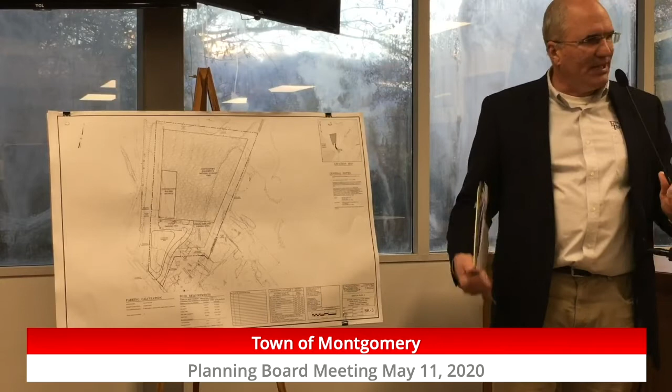Butler is proposing the construction of a 30,000 square foot contractor's office and storage yard on Dunn Road. Dunn Road is the road that services Orange County Airport, just west of 211. The site is actually kind of hidden. You got to get into the airport property, and just as you were about to turn into the fixed base operations there, you would actually turn to the right to get to this property.

The site is 11 acres. The applicant is proposing the construction of a 30,000 square foot building. The building will house office operations for Butler Construction, as well as have bays in the rear for maintenance of equipment and storage of materials in the building.

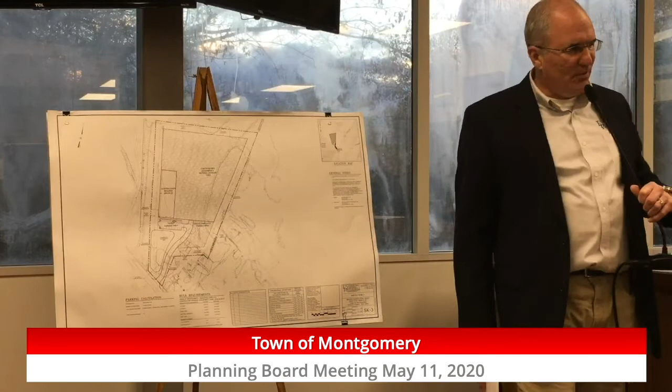There are 30 parking spots out front. Those parking spots are primarily for the employees of the building. There's an additional gravel parking area to the east side. That parking area will be used for employees that will be coming to the site, picking up construction vehicles such as trucks, and heading out to the job site.

There is a large yard as part of this operation. That yard will be used for the storage of vehicles and equipment and materials associated with the construction site. Sometimes they'll be staging materials there that need to go to the construction site, but mostly for equipment that may be going from one job to another or may be idle for one reason or another.

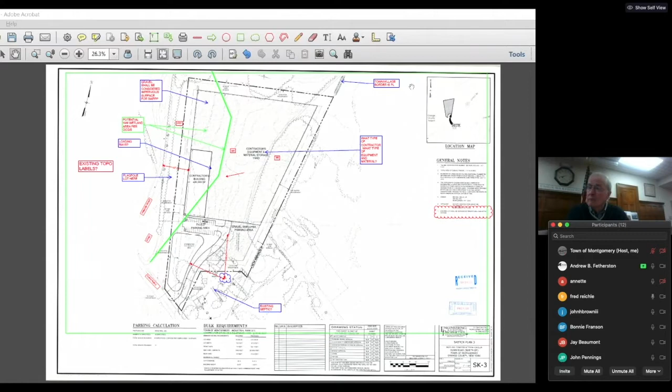We did receive the comments from the town's consultants. Be glad to discuss any that you might want to specifically. I would say there's one primary comment, and it showed up on Bonnie's review, but it was something that we were made aware of earlier this week, and it's regarding the use.

The plan had indicated this was a contractor storage and equipment yard, and I think that's incorrect, as Bonnie notes. So that is just, in my opinion, just an open yard. There's no building attached to that use. What we're proposing is the contractor's office and storage, which is a building for contractor's office area with indoor storage of material and supplies. We view the outdoor yard as accessory, and we think that that's permitted under the code, under your site plan review ordinance, that we can have on-site improvements that are accessory to the main use, as long as they are identified and approved by the planning board.

And I think that's the threshold issue we want to get clarification on tonight, to make sure that we're headed in the right direction, or if we need to get any kind of interpretation from the rest of the board, or from the ZBA. Be glad to answer any comments.

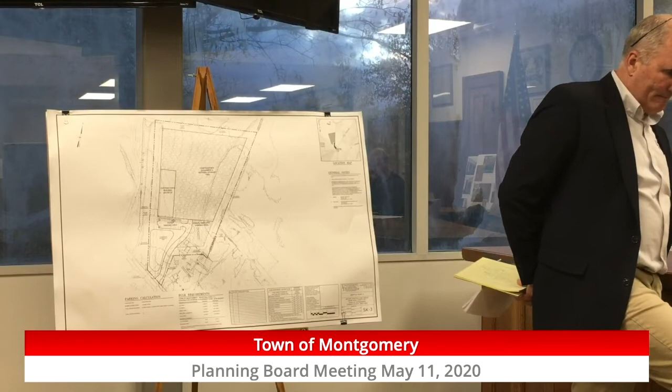Is that the same zoning district? Yes. I'm not familiar with that. Okay, was this at the corner of 460? Right, I know where the building is. I just wasn't familiar with if it had been upgraded or when it was approved, what it was approved as.

Just to clarify, Rich Hoyt here. Ross, isn't Storm King in the ID zone? I looked at it today, it's both in the I-1. My zoning map shows everything south of 84 is ID. Not the map I looked at today, but I'll believe you if you're looking at it now.

Ross, I'm having a real problem hearing what you're saying. I know it's not your fault. Is it too loud, Rich? I'm sorry, I can't hear you. Ross either. I don't know if it's too loud or too quiet. Too quiet. Okay, it's just picking up my computer, that's all it's picking up.

I'm looking at the zoning map right now, which I can share, and Storm King appears to be in the ID zone. ID or I-1? ID, as in, yes, David.

This was Marcinak's yard, correct? That yard, correct, Marcinak's, they're moving here. Whoever's running that currently is using Marcinak's yard. And this is just for machinery, it's not going to be piles of dirt and stone, or it could be. No, it could be pipe or stuff like that, but they wouldn't be delivering it twice if they could help it.

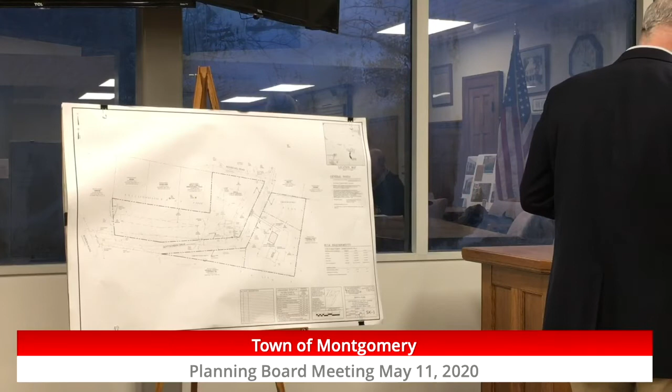While that's being done, do we want to do some of the minutes? Sure, because we've got 7 of them. So the first group of minutes we could adopt are the May 29th, 2018 Planning Board meeting minutes.

Did anybody have any significant comments, anything of substance for that? I passed mine on to Sue. Do you remember if there was a lot to them, Rose, or they were just minor? Minor, okay, all right.

I'll entertain a motion to approve the May 29th, 2018 Planning Board meeting minutes. Motion by Jay, seconded by Rose. Any discussion? Fred: I'm going to have to abstain, I don't think I was here. Okay, right, yeah, that's right, you weren't.

Fred, I have that if you want to go back to the plan — I have it on my screen right now. Okay, well, let's finish up the May 29th minutes first, if we could, quickly.

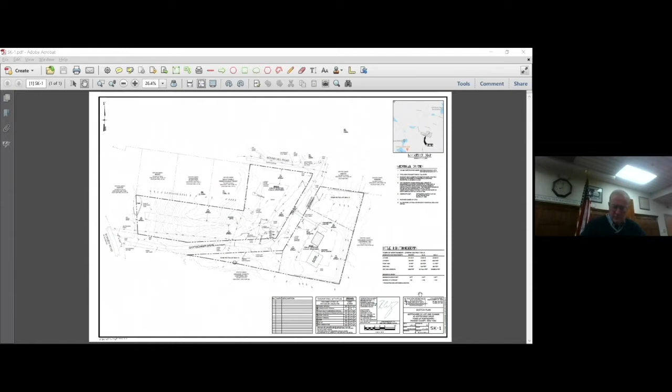Thank you. Good evening. For the record, Ross Winglovitz with Engineering and Surveying Properties, here on behalf of Gotchier Country Club for a proposed lot line change. Gotchier Country Club is a private entity that owns these 2 parcels of land on either side of Gotchier Drive. One contains the clubhouse, the other across Gotchier Drive on the east side contains an open field and a rec area with some recreational amenities.

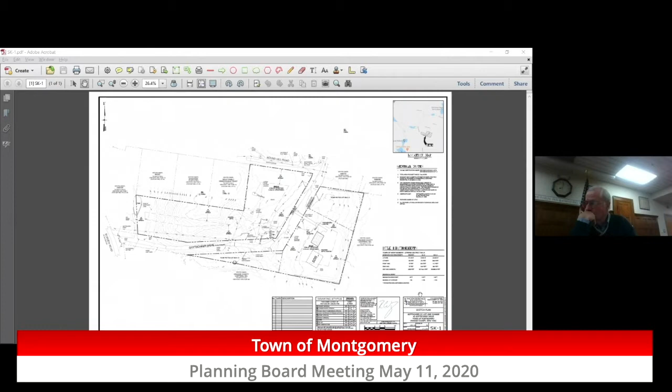The country club members are the members in the subdivision. They have decided that they would like to sell the open field area for a residential lot. They've asked us to prepare a plan for a lot line change between the 2 lots, the lot containing the clubhouse and the recreational parcel that is open space right now. That lot line change would take 2 odd-shaped parcels from the piece on the east and add them to the clubhouse parcel.

They use the area north of the house. A lot of the residents use that as a wooded area, to dump leaves and twigs as part of their spring cleanup. So they want to maintain that by the country club so they can continue to use that area. And the area to the south of the country club is also used by residents and contains the mailboxes. They would like to retain that as well, leaving a new tax lot 38-2-9, which would be about a 2-acre parcel proposed for a single family residence with a well and septic.

There is no public water here. All residents are served by well and septic. The roads here are private, maintained by the Gotchier Country Club. There is no HOA, the country club is actually a country club. I assume it's some kind of non-for-profit organization that was formed back when they created the subdivision. In fact, the original parent parcel was deeded to the country club. Once this is perfected, they would be looking to sell a lot to raise funds for the country club. Be glad to answer any questions you might have.

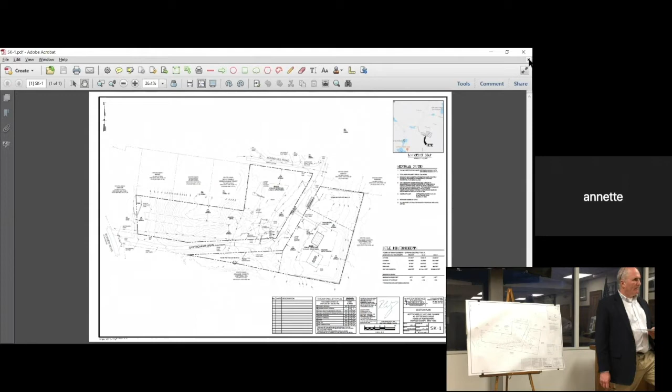To sell the one on the east side of Gottscheer as a residential lot, is that the intention down the road? The intention is this one with the house, the lot with the house that's remaining, the remaining tax lot there, 3829, would be the only residential parcel. Those two other acreage parcels would be then connected across Gottscheer.

So there's no intention of building anything? No, no intention of building anything on those parcels. They become part of the clubhouse. Is that like the ball field they have now? Yeah, it's an open rec field. And then there's a little chapel across the street too, I guess? Yes, and the clubhouse.

Anyone else on Gottscheer? Ross, my comment has to do with showing wetlands on that triangular parcel and the stream. So what Bonnie's concern is there's wetlands, potential wetlands here, in this little triangular parcel. Bonnie, we're not proposing any construction anywhere near there, so we would ask for a waiver from having to delineate that. I think it's more just to have a rough boundary of where it is, because it may not extend... well, the question is, is it subject to, in the subdivision regulations, buffers and setbacks from streams and from particular features.

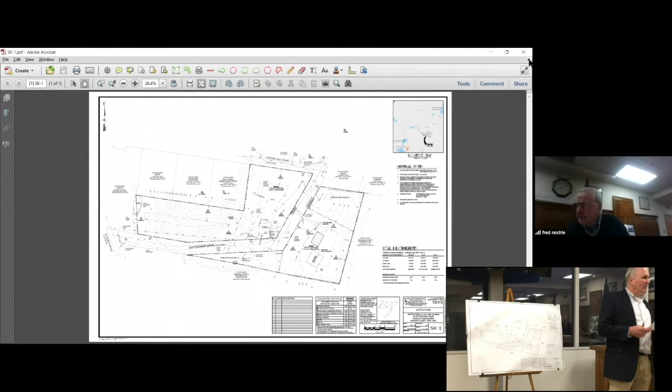And Andrew, I would just note, I think you said the mailboxes may be on the triangular piece, but they're actually in the private right of way, not in the location you said exactly. And the only thing about the triangular piece, I don't know if there's bamboo growing there.

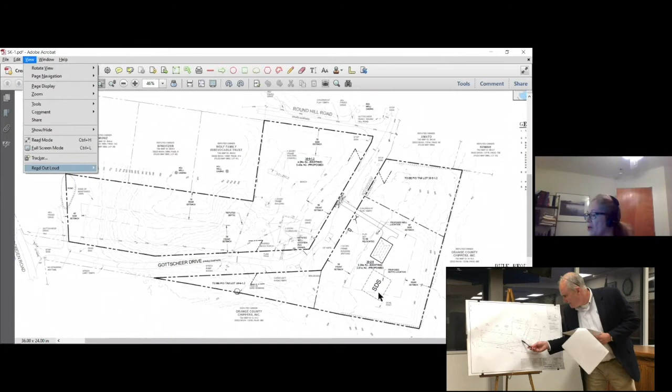In general, this is something for Andrew to take a look at - there's a catch basin. It goes underneath the road, and then it looks like it's supposed to be draining toward the stream, but because of grass clippings or whatever's happening over there, I think it's kind of blocking it off. So as a matter of practice, it should probably be looked into.

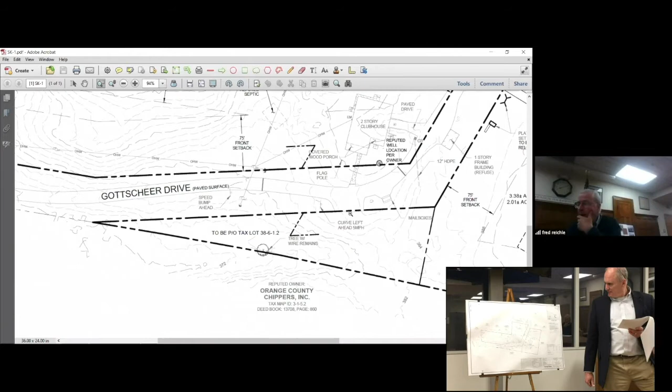And Ross, right now there's I guess a trash storage building that's on Gottscheer. Yeah, so that's going to stay in its location, in front of the new house. It's not going to be relocated, right? Correct.

All right, and you otherwise have my comments. I was going to bring up that wetlands issue to see how you wanted to handle that, so that's good. The goalpost, I don't know what condition that's in. If it's in any kind of condition, I would prefer to leave it because the future owner may want it. Let that be between the two private property owners.

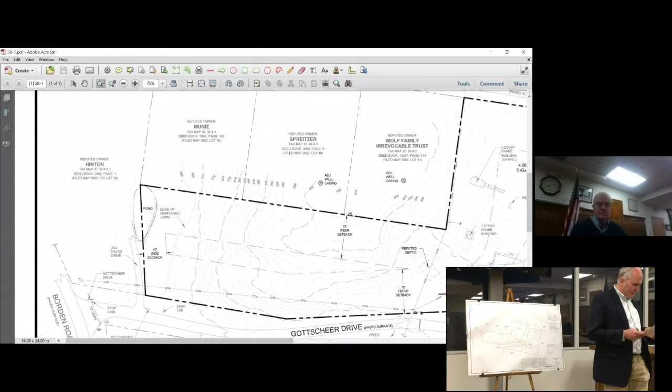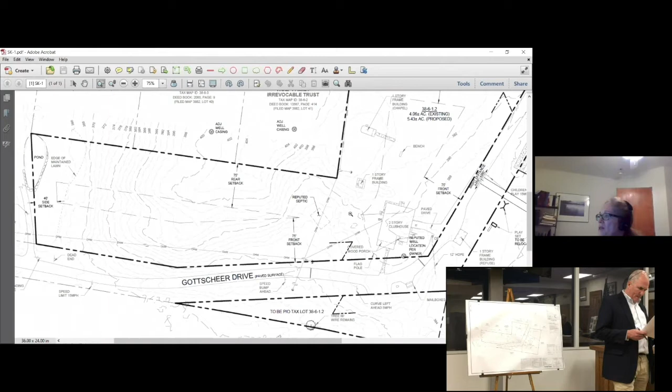It's a nice field there, they have a soccer star in their family. The rest of the criteria, I think we can meet, we'll demonstrate that in our response. And then the only other thing is maybe a note, if we're not going to do mapping or we're going to do approximations - that stream, if you look at the environmental resource mapper, is designated, I think, AA, because it's tributary to a water supply.

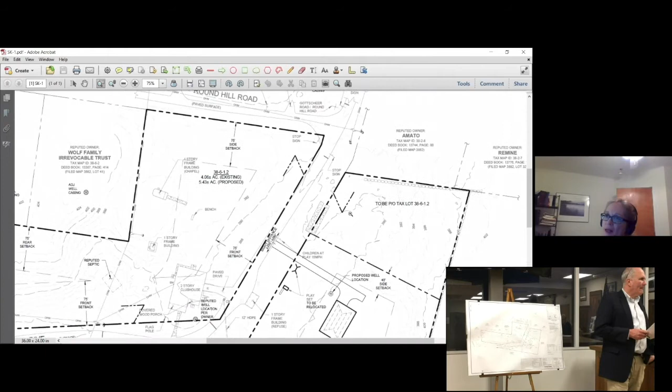And so DEC, if anything's proposed within 50 feet of it, you might need a protection of waters permit. So just as maybe a map note, we could put something to that effect about recognizing it's an AA stream. We'll label it on the plan and provide it up to that effect.

Okay, anyone with anything else on Gottscheer? I had one more question, Mr. Chairman, Rich Montemorano. Why isn't the property line coming up to Gottscheer Road? Why are they set back, and what's with that piece of the long strip of land in between the lot lines and the road? Is that intended to be attached to something at some point?

No, that's all the old right of way, Rich. We don't know who the owner is. It's not shown as public right of way, it's not shown as owned by Gottscheer Country Club. They in fact do maintain all those roads. So where it does cross out of the right of way, it crosses onto the country club's property, so at least it's their responsibility to maintain it.

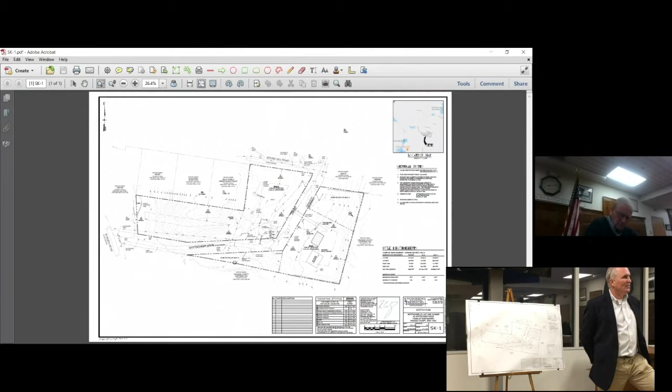Ownership issues. Is it paved or wooded? It's paved, yeah. So the whole area in between the lot lines is paved. Between the pavement and our lot line at the front is all grass area. Yeah, there's some large trees that Bonnie noted, we'll show to make sure we avoid, and it's all grass. All right, thank you, not understanding that. Thanks, Rich.

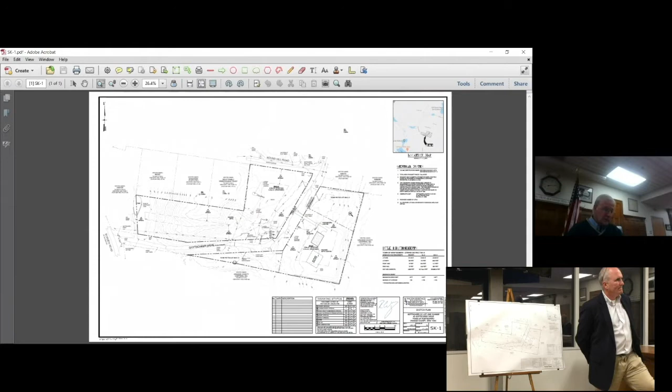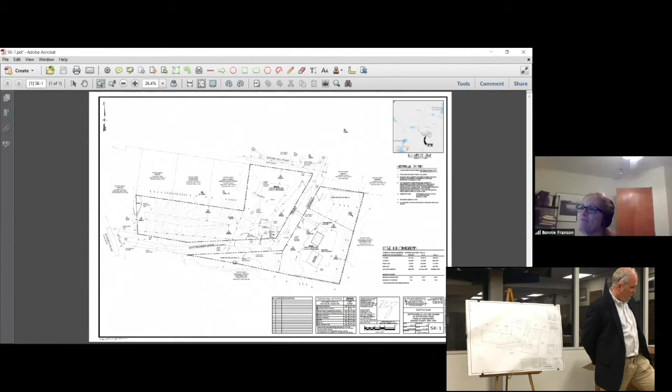Okay, anything else, anyone? Bonnie, it's Andrew. If you could just identify that drain that you were speaking about, I'll take a look at it. Okay, yeah, it's the drain itself, where it outlets is within Gotchier Drive. Can you zoom in? If you could just put a circle on the plan, take a picture of it with a camera and send it to me, that'd be great. Okay, I'll do that. Super. All right, and I'll save this plan for myself. Okay, all right, great. Actually, could you send that to me, Andrew, and then I can circle it on the plan? Sure, thanks.

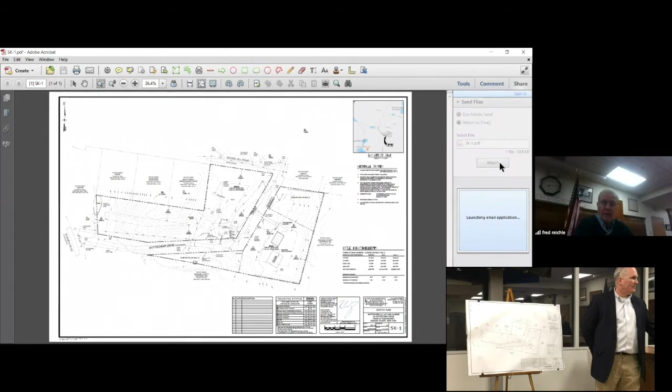Okay, anybody, any other questions or comments on Gotchier? Mr. Chairman, I believe this is a lot line adjustment. Yes, a lot line change. So lot line changes, adjustments are exempt from SEQR. I don't know if you normally do a resolution or just make a motion to indicate that it's a type 2 action so there's no further SEQR involved. Normally, I believe we would. Okay, so I don't know if you want to do that this evening or just do it another time. Yeah, I don't think we have to. We can do it on our next go round.

All right, let's look at these things, and we're also going to reply to Bonnie's comments regarding soil testing and resubmit for the next meeting. Or maybe not your next meeting, but the June meeting. Yeah, okay. All right, that's good, thank you. Okay, thank you everybody, thanks Ross.

Yep. Okay. Let's see.